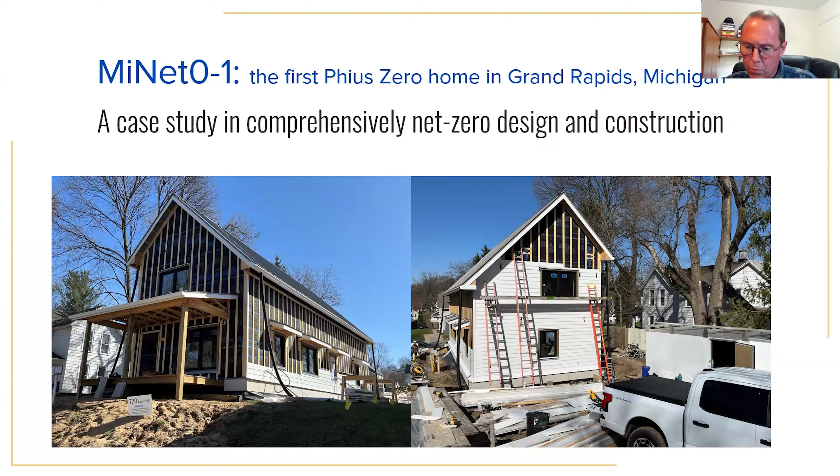The title for this presentation was Net Zero When? And when do we want net zero? We want it now. So trying to move as quickly as we can toward that and just do it.

Talk a little bit about how I came to be in this spot after 30 years in commercial HVAC. Some innovations in the house, the foundation in particular, are pretty unique. And then go through some more normal passive house best practices, with the survivability piece there being pretty innovative also. And then take a look at this all from a life cycle cost analysis perspective.

So a little bit about me. As I retired here in 2020, I started the process of retiring, and I spent a little bit of time with a pastor, counselor from my church, and walked through Enneagram and skills and values and the book Let Your Life Speak by an author named Parker Palmer.

The goal of all that was to come up with a mission statement, and you see it there in yellow at the bottom: I learn and create in order to help people live sustainably. That helped me focus a bit because I'd been doing some climate advocacy work since about 2017. I'm okay at it, but I'm not the world's greatest salesperson. I'm better at just doing things and creating things. So that helped me focus where I wanted to go.

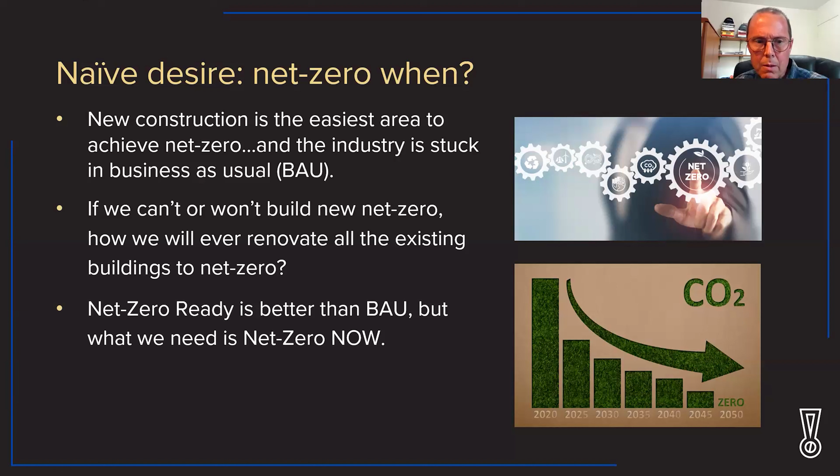I saw Griffith's book, Electrify Everything. We've got 1 billion machines in the US that need to be electrified over the next 30 years. We need to start with the new stuff. If we can't build the new stuff net zero, how are we ever going to get all the existing buildings retrofit to net zero? So it seemed to me that's the place to start - let's figure it out on the new buildings. Some of you are already figuring out how to do renovations, but frankly renovation's harder, and I wanted to start with what seemed a little easier. So, yeah, wanting to get to net zero now.

So, first innovation was to design the house on a narrow city lot - a 50 by 175-foot lot - and design it as kind of a long shotgun house, optimizing that roof so I've got lots of south face with enough solar to power the house and 2 EVs. I got certified with Solar Edge Designer 1.2 so I could run preliminary runs on the solar and play around with the roof size and profiles to get that to work right.

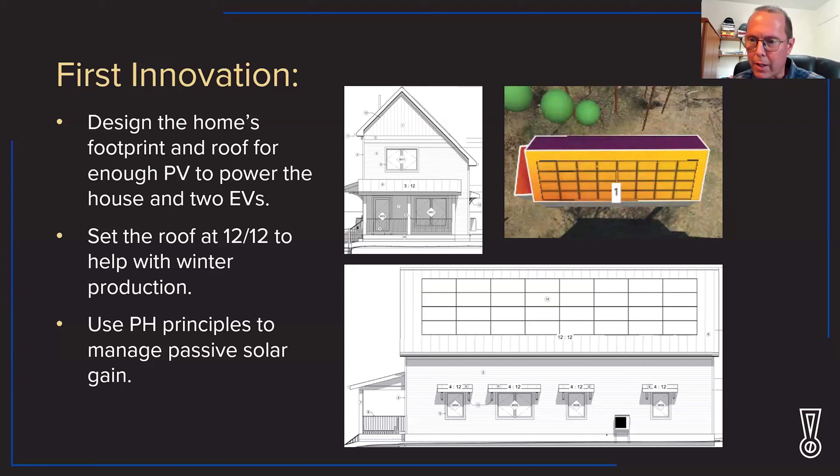Also decided to set it at 12-12 so we can shed snow a little better in the winter, and also optimize winter production. And then, of course, using some passive house principles on those south-facing windows you see in the lower drawing there. So some innovation there, but something I'm sure others of you have thought about too as you design a site and the roof line on the house. But I think it's important - let's not ruin that roof when we have a chance to get it right for the next 100 years. Let's set it up for success for solar.

So second innovation really has more of my fingerprints on it. I spent multiple hours sketching and playing with ideas of how to get to a concrete-free, foam-free foundation system. I combined 3 rare ideas to get to this, and put it all on a base of foam glass aggregate. This was something I would do again.

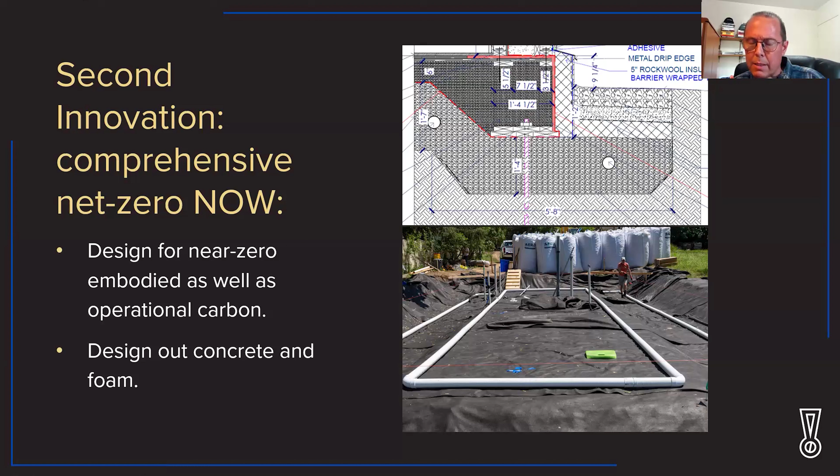But the goal was to be not just net zero operational, but net zero embodied carbon. Here's the foam glass aggregate going in these 3-yard super sacks, getting compacted. This is the part I wouldn't do again - these 2 levels. We had lots of struggles fighting with this slope, and the stuff would roll down. And then when we started putting our footing in, it would roll down under the footing and cause us some grief trying to get the footing nice and level.

So next time I would just do it all flat and fill it with more pea stone, which you'll see in this next slide. So here's the wood foundation going around - 2x6 inside, 2x4 outside on this treated plywood and 2x8 base, glued and screwed together, glued with climate adhesive, which we'll talk about more in a minute.

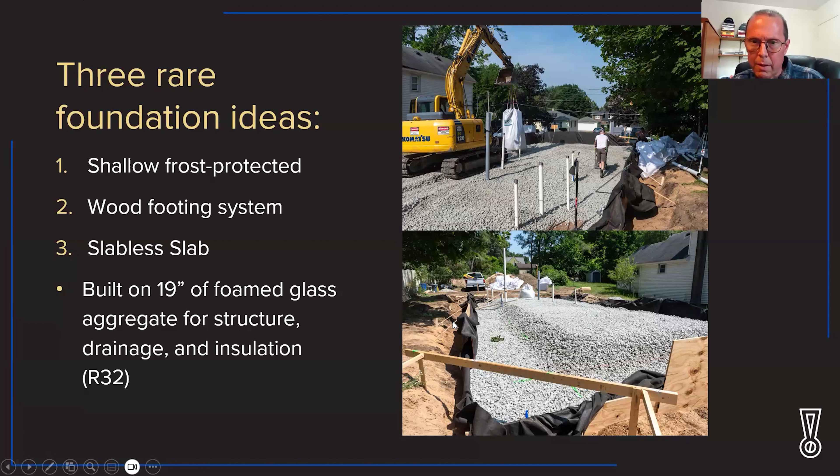And as we built that up, then we filled it with pea stone - 6 inches on the main floor, the slabless slab area - and then filled the footing up on the outside. So there's 50 tons of pea stone in here. Had we just made this flat across, we'd have had probably 100 tons in there, but I think it would have been a simpler way to build it, and pea stone's pretty cheap.

So, yeah, we screeded the pea stone across the footing. We put some screen in here - this darker color is a fiberglass insect screen that we use to keep the pea stone from getting into our tongue and groove plywood here. We had 2 layers of tongue and groove southern yellow pine plywood that we glued and screwed together, again with climate adhesive.

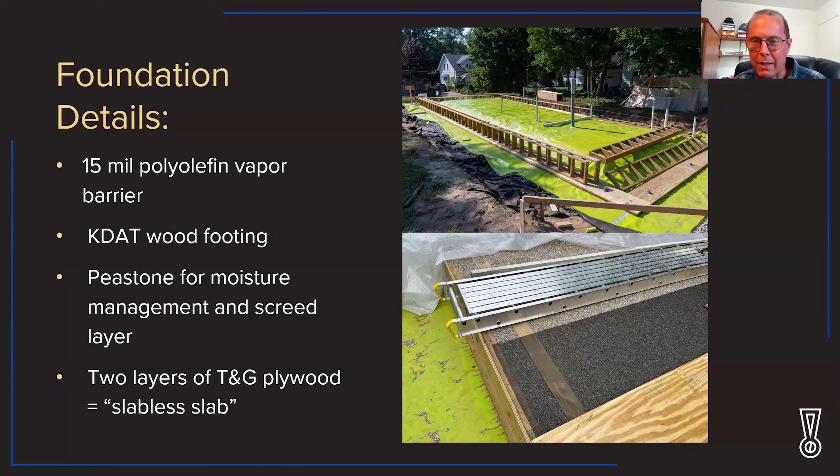So those three rare ideas, the shallow frost protected foundation, the wood footing system, and the slabless slab all on that gravel base is probably the most innovative thing in here. And as far as I know, the first one that's been done in the country. I did get the idea from, I've got to give some credit to the folks on the Building Science and Beer show. I believe it was Mike Guertin had a little sketch he held up at one point in a webinar they did maybe two years ago. And it's like, that's it. That's what I'm going to do. So I took their idea, modified it a bit, and put it on this foam glass aggregate base.

So into more typical best practices when you're trying to build low embodied carbon, use natural insulation. I chose TimberFill and Timber batts from TimberHP out of Maine. Very happy with the product. I know they're kind of struggling with some financial, getting to the next step to do their timber board right now, but I would use them again, assuming they can financially pull through a Chapter 11 reorganization I understand they're going through, but good product.

Really happy with it. We've got 13 inches of the dense pack in the main wall cavity, and then plus 3.5-inch batts in the inside service cavity. Makes for a very quiet house. And it sequesters about 8 tons of carbon in itself, weighed about 12 tons. So 12 tons of insulation in the house is just kind of an interesting number to know.

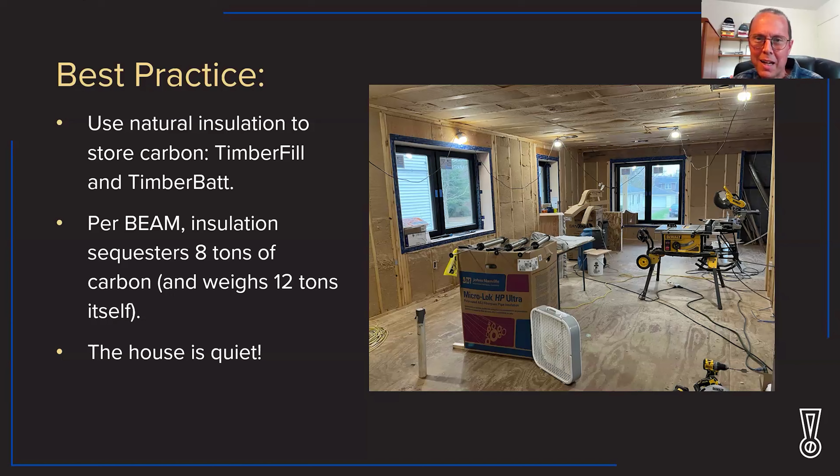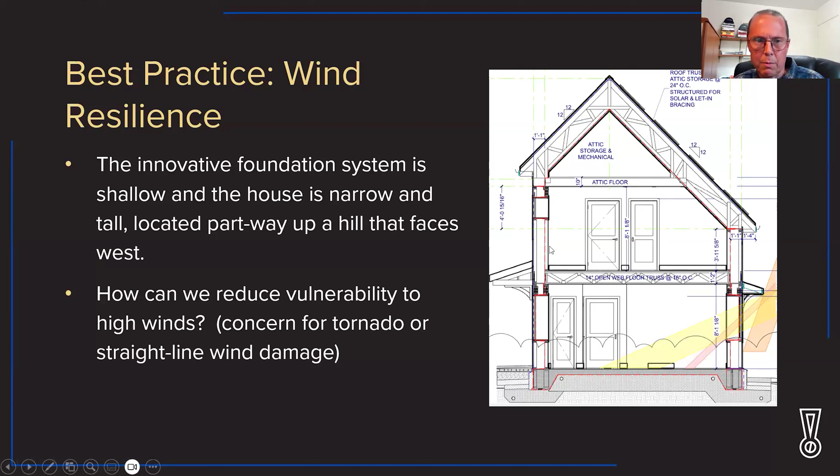And decided we have ground screws. So basically everything's fastened together. So the goal is to make this less vulnerable to wind. How do we get there? We fasten everything together with continuous connections from the ground to the roof, following the ideas from the Insurance Institute for Business and Home Safety, IBHS, which has a FORTIFIED standard that I checked into a couple years ago.

Wish I'd have found somebody to certify it. I made one call to the one person who was listed in Michigan, and he said, I'm not doing that anymore. Just kind of build to the standard and don't certify. Well, I wish I would have chased a little harder and actually gotten it certified, but I didn't. So we'll do that on the next one.

But anyway, you can see here's our ground screws going through that footing system. They're about 46 inches long, go through the foam glass aggregate down into the sand. There's 16 of them around the perimeter. And again, everything is screwed with stainless steel GRK truss screws, in addition to normal nailing. Also used blocking up in the attic trusses. There's blocking between them, which gives that a bunch of stability and more ability to fasten it down.

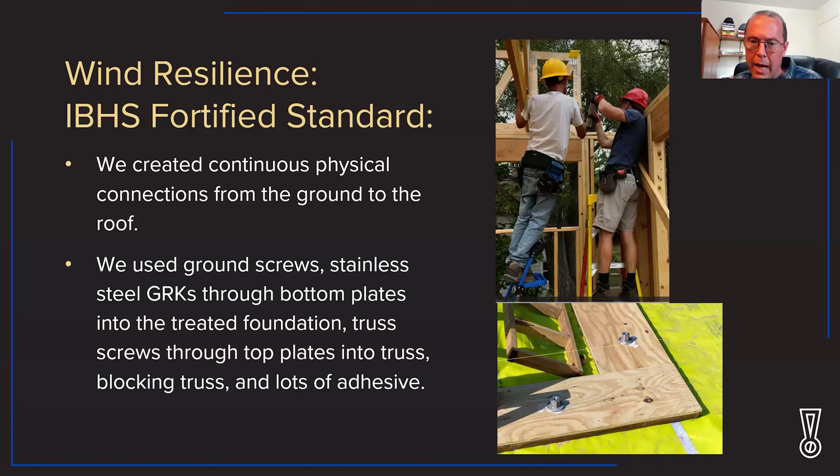And everything's got lots of adhesive in it, which is where we can pivot to Kristen here. Yeah, we used it everywhere in the building, under our subfloors, under trusses, throughout the building, and it significantly strengthens those connections. So Kristen, go ahead. Yeah, sure. I don't know if you want to advance the slide.

But yeah, Dale heard a webinar on Green Home Institute, which we gave, and I think during the webinar he ordered a case, just fearlessly willing to go where innovation proves itself to be viable. So hats off to Dale for helping create this beautiful, beautiful case study. I've been there a few times and it's just an amazing space to be in. And Dale's an amazing innovator.

So he put it under plates, subfloors, sheathing. It's intended to act like a monocoque system and give that continuous load path. And the secret sauce, if you will, is its ductility. That's why adhesives are not allowed in code right now. We are going to change that. I am personally working hard to change that so that people understand that there's a new capability in the vertical to disallow the embrittlement that a urethane has done in the past, and that's why it has been disallowed in the past besides in a subfloor application.

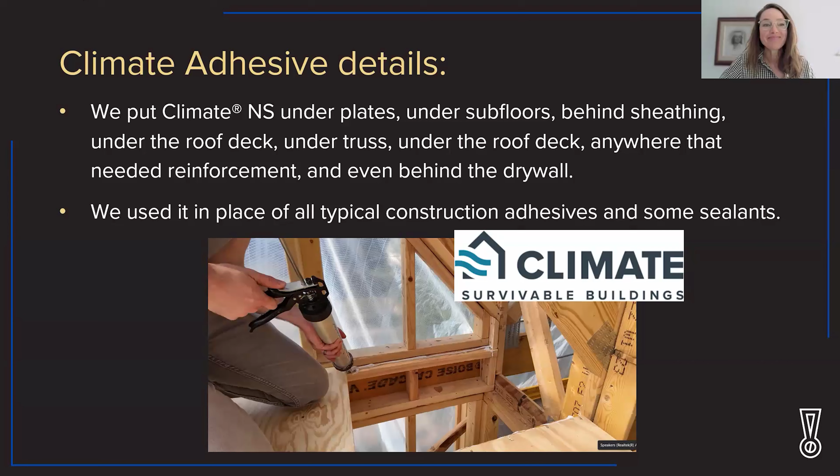Yeah, just one other thing. I'm a data geek, so I did check out your videos. Or maybe one of your people sent it to me, but there was a video of the testing at Western Michigan University. So anyway, just nice to see that it's not just claims, but there's been testing done and such. Well, goodness, yes. We're in the middle process, like I said, of getting into code. Before that, we're doing our ICC ESR, sort of the gold standard for all structural engineers and architects. So there's not going to be any question about anything whatsoever, but there is a wealth of information.

Anybody who wants to geek out about load and kips and all that, because we do apply to a shear wall application as well as uplift. So we mitigate against seismic as well as violent wind events, which unfortunately more and more of America and the globe is becoming subjected to and vulnerable to. So we wish we weren't so relevant, but we're here. Great, yeah, and excited to be using it and pioneering it on this project. So thank you. Thank you.

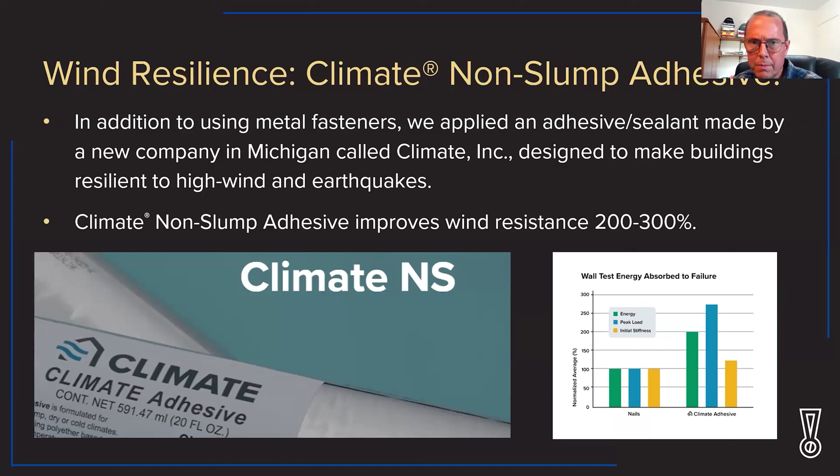Another thing I would consider a best practice: when I first looked at all this, I thought, do I want to certify? When I started watching Green Home Institute, there's this alphabet soup of different certification options out there in the world. And I thought, now I'll just build a good house. And then the more I got into it, it's like, no, I think I need to certify. I need the support from people who have been down this path before. And there's something about just the credibility that certification brings.

So I looked at ILFI, International Living Future Institute as well, just from a holistic, creating a beautiful space kind of ethos, and didn't decide to do that. This house is LEED Platinum and Green Star Platinum as well as Phius Zero. So I've already got a pretty good list of certifications to chase. So I didn't chase it, but we are doing native landscaping per this plan. And I've got some pictures I could show if there's time at the end of landscaping going in right now. And I've been surprised at how good it feels to see plants going in around the house, and trees and little shrubs. It really makes the house.

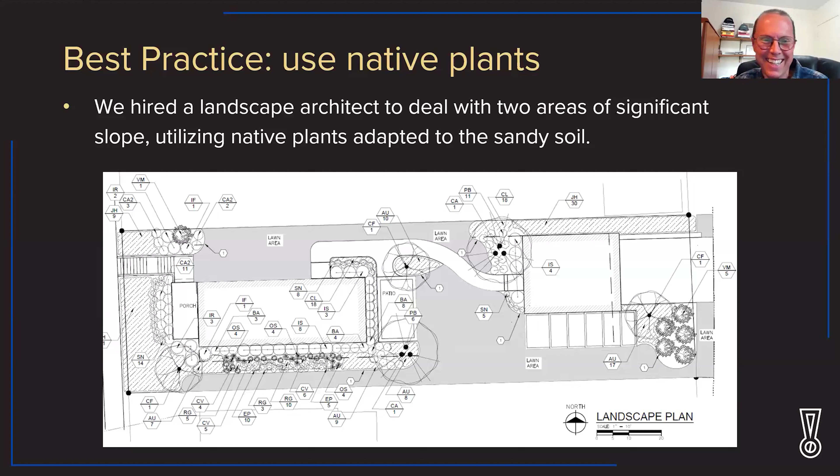So just quickly summarizing, how are we doing on time? I think we're doing okay.

I'll kind of run through this quicker, pick up the pace a little bit, but just kind of the recipe for the house, kind of at a high level spec level. You can see our 59 walls, 94 roof, 36 floor with the foam glass aggregate down there. It's a double membrane system. Intello is the primary air barrier on the inside double wall. It's on the exterior side of the interior double wall.

So it's protected from people ever putting nails, hanging pictures and that kind of thing, which made a lot of sense to me. Those membranes are extremely valuable, and we spend a lot of time detailing them, and you want to protect them. So the Mento on the outside is a vapor open and water resistant barrier, and that's protected by the rain screen on the outside. We talked a little bit about low embodied carbon design already. I got a slide coming up where you can see some of the BEAM calculations on that.

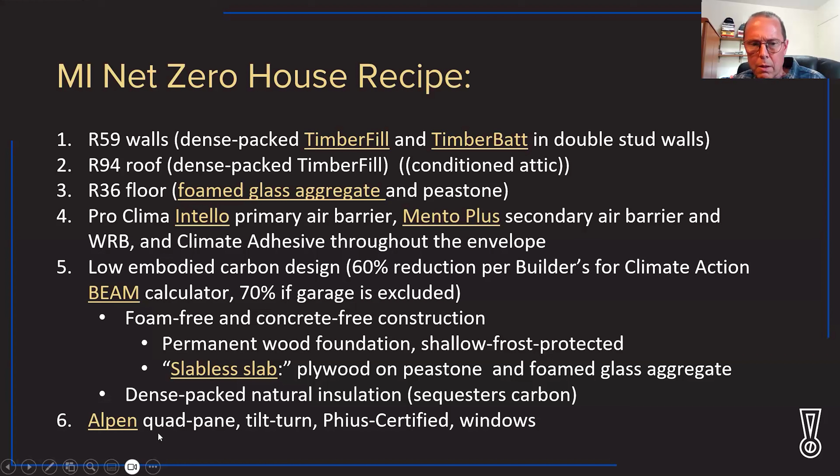I used Alpen, quad pane, tilt turn windows. They're all operable. Finishes, tried to pick everything. As far as I know, I succeeded. It's so much work to look at all these details as you go. But trying to pick red list free materials, and net zero materials when possible.

We're using a Milestones net zero tile, Yorktown maple cabinets that are domestic, Dekton countertops. They come from Spain, which I don't love, but it's a net zero product for countertops. And Benjamin Moore paint. The LP SmartSide has got lots of adhesive in it, which I don't love, but it's a decent product from an eco standpoint.

Here's the appliances and HVAC. Little 1-ton Mitsubishi heat pump. I did go with a Sanden monoblock heat pump water heater. CO2 is the refrigerant in it, which I think is fantastic. I think that's the future. I'm a heat pump geek. In my former life, we converted rooftop units into heat pumps in our shop. We did custom kind of work in our shop. So I'm pretty familiar with the details on heat pumps and low ambient heat pumps in particular.

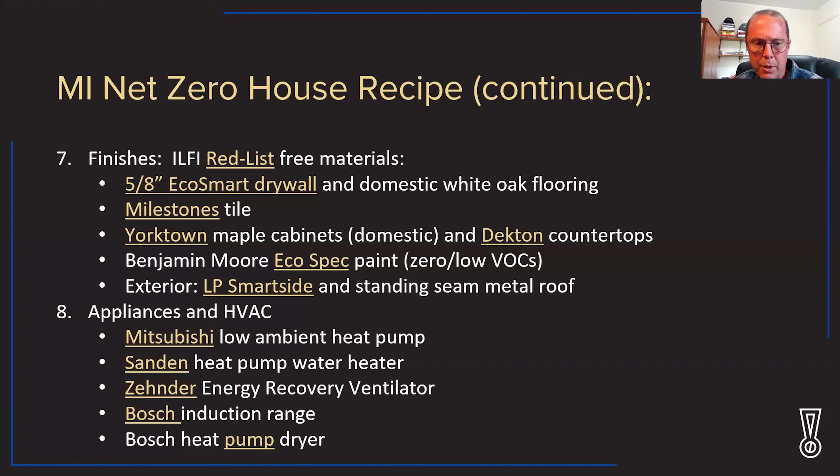Using a Zehnder Q450 with the boost switches and the humidity input and the CO2 input. So I should have a very intelligent ventilation system, Bosch appliances. And then, of course, the solar system, we went with Enphase with Meyer Burger panels, 32 of them on the roof, 40 kilowatt hours of battery, two 9.6 kilowatt EV chargers in the detached garage, which we haven't started building yet.

The site kind of precluded building the garage because we had to get equipment down onto the site as we went. So it's almost like a second project that will follow. I probably have an excavator there next week, so we're getting close to doing that. And I wanted, in the worst way, to do vehicle to home or vehicle to grid would be better yet. And Enphase had announced the product 2 years ago, and they still aren't shipping.

So I'm doing what I'm going to call poor man's vehicle to home, putting a 30 amp generator plug in the garage. I happen to have a Ford Lightning that I've been powering the job site with, including a temporary heat pump. And yeah, it works well. It's quiet too compared to running a generator. It's awesome. So anyway, I'm putting a 30 amp generator plug in there, which is 7.2 kilowatts of power that will go into the Enphase system if needed, in a situation where you wanted to also use your car battery.

So I've got Span electric panels, two of them, one in the house, one in the garage. And at this point, still planning on a Consumers Energy interconnection. I'm a believer in the grid for grid load and generation diversity helps us. And helps us be more efficient with resources. So in general, I believe in the idea of having a grid.

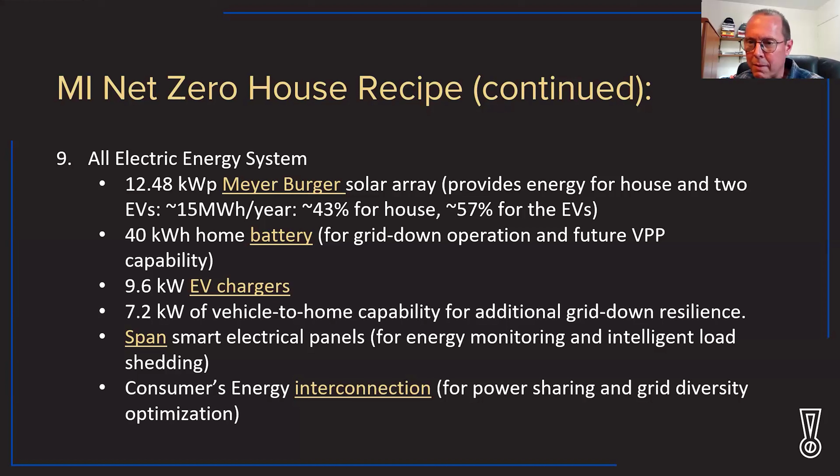I'm extraordinarily frustrated by the interconnection rules here in Michigan right now. I might not end up with panels on my roof till after the house is done, which is crazy from a project management standpoint. So anyway, that's kind of the high level recipe.

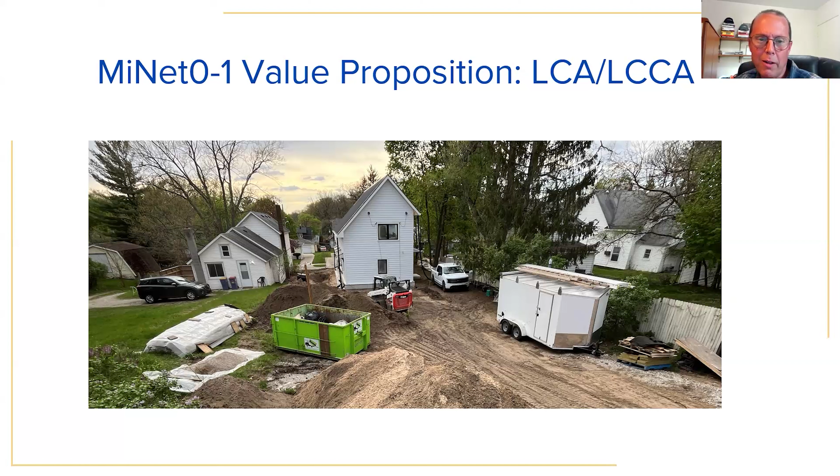And wanted to spend a little time on thinking about costs, because I mentioned I went into this with some naive desire at the beginning. One was on costs. I thought I would build a modest house. It's 1,510 square feet, in a modest neighborhood. There it is between the neighbor houses, and it looks small in this view. It's kind of a wide angle view.

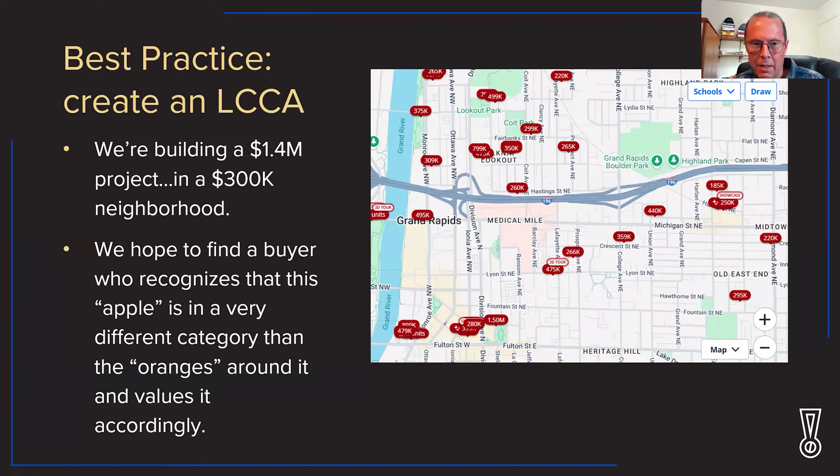It's in a neighborhood where the houses are probably 300,000 tops, with a few more expensive houses within a couple miles, but this is definitely an apple we're trying not to directly compare with oranges, or at least to show a potential buyer why this house is worth $1.4 million. My biggest challenge is I built this house the way I'd want to build it for myself, quality stuff everywhere through the process, and it ended up costing double what I had imagined at the beginning.

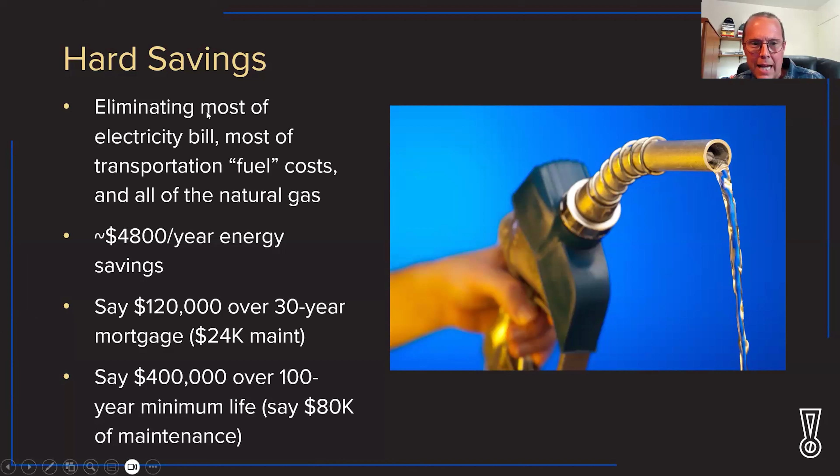I made an attempt here to quantify the value of a house like this, so I'll try to go fast. I've got a few different buckets. The easiest one is the hard savings, the energy savings, which amounts to about 4,800 bucks a year saved in fuel, both for vehicles and for the house. That's 120 grand over a 30-year mortgage, allowing a little for maintenance, if you had a 100-year minimum life, since the membranes are rated for 100 years - maybe it's a 300-year house, we don't know for sure. But that's the easiest thing to quantify, adding up those energy savings.

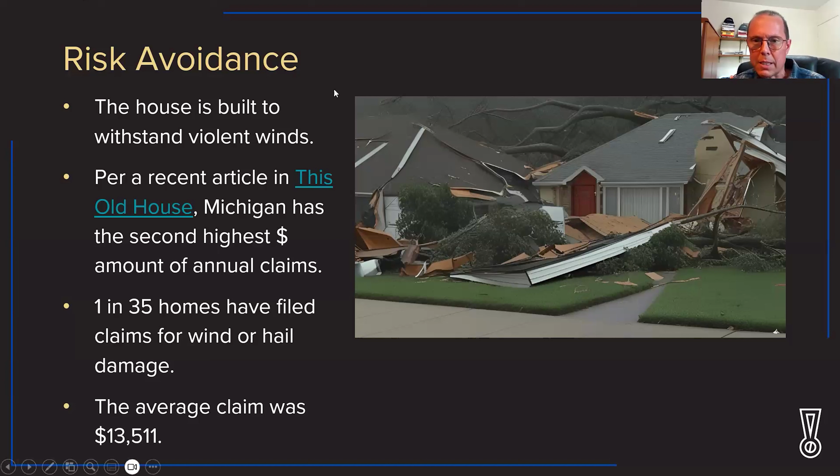There's also risk avoidance, which we've already talked about with the winds. These numbers get less solid as we go, and I've actually built a little spreadsheet where I could sit down with a potential buyer and run through: how many dollars a year is it worth to you to have a house that's going to stand up to wind much better than your neighbors would?

The house should not form icicles - it just shouldn't happen. It's a vented roof deck with R94 insulation in the roof. It did not form icicles this winter. The steel roof's been on since November. I didn't have the house fully heated through the winter, I had some heat in it, so it wasn't a perfect test, but I'd be amazed if it formed any icicles.

And like all passive houses, it will hold heat for days in the event of mechanical problems. In our case, we go home on weekends, the truck's not there, so the heat pump doesn't run, and it's dropped 5 degrees by Monday. So we know the house holds heat.

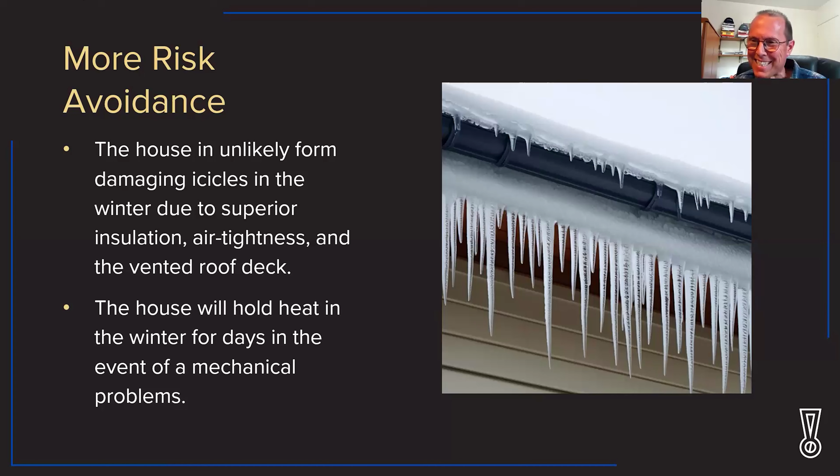But this was a way I could directly try to reduce the emissions of somebody's life who might buy this house. It ends up being about 14 tons a year in operational emissions reduced, including the vehicles. That's about 2/3 of the average American's carbon footprint - the house energy use plus vehicles is like 2/3, and what's left is what we eat and stuff we buy. If we fly a lot, that adds to our footprint, which you can buy offsets for if you want. So I'm trying to help somebody get to a net zero way of living.

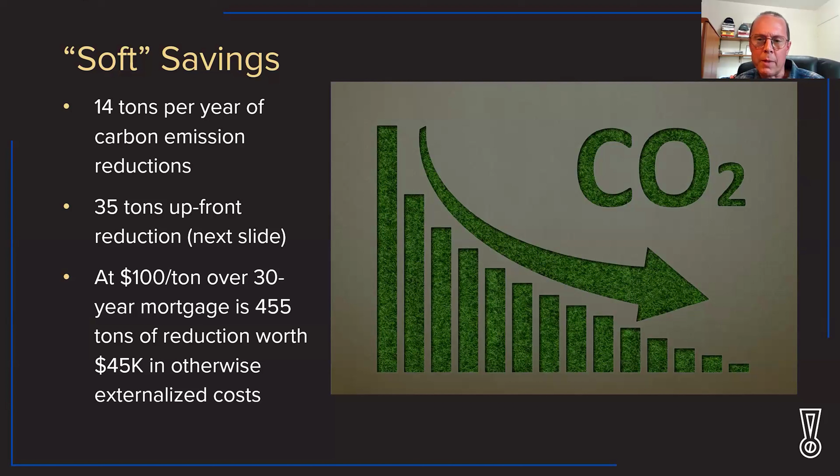So here's the embodied carbon details from the BEAM calculator. We're at about 24 tons for the house and garage as built. The garage is over 1/3 of that.

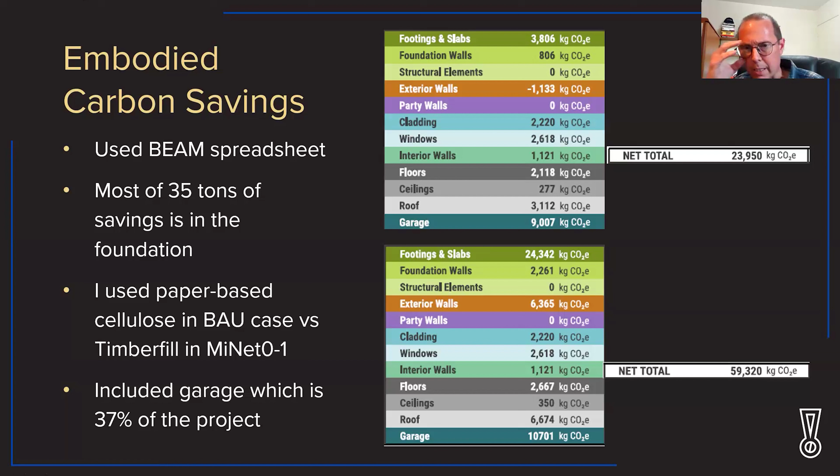The garage, unfortunately, needed to have conventional cement footings and frost walls in it, and I cannot find anybody in West Michigan who will sell me low carbon cement yet. Very frustrating - I've spent quite a few hours digging around and come up empty. A more conventionally built house would be more like 59 tons for this same house built more conventionally. I did use a paper-based cellulose, and in this analysis this number would be worse if it were fiberglass, and much worse if it were foam.

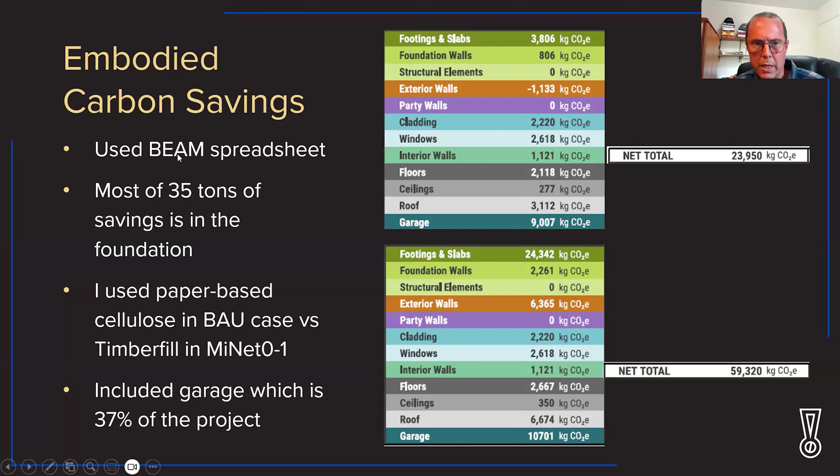The cement is probably the biggest reduction you get, and the next biggest is not using foam. There's details on that. It's a great tool, simple to use. If you haven't run into it, it's worth looking up: Builders for Climate Action out of Canada, called the BEAM spreadsheet. It's a Google sheet.

The house is going to have super fresh filtered air. I'm putting in a MERV 16 filter, which I believe is a Green Star Platinum requirement. And I'll provide them a meter to watch their PM 2.5, radon, CO2, and VOCs.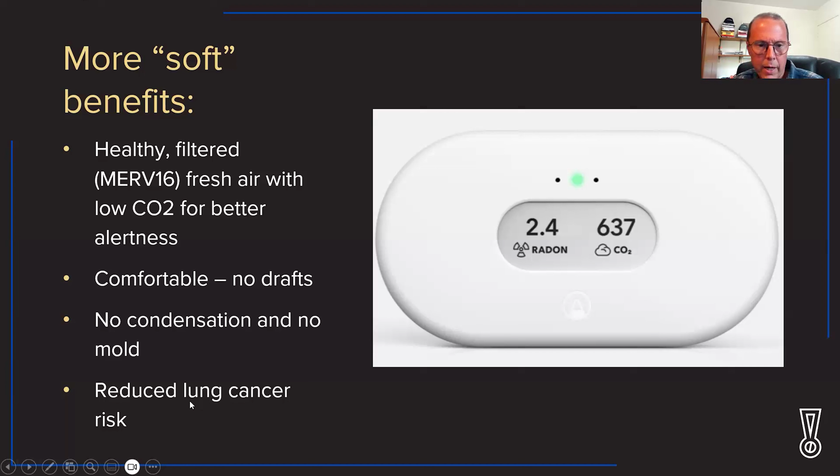The houses, all passive houses, will be comfortable. There won't be any drafts. There'll be no condensation on windows, therefore no mold on windowsills and that kind of thing. We've reduced the chance of radon through the passive system, so the lung cancer risk is reduced. We've used non-toxic materials like we talked about.

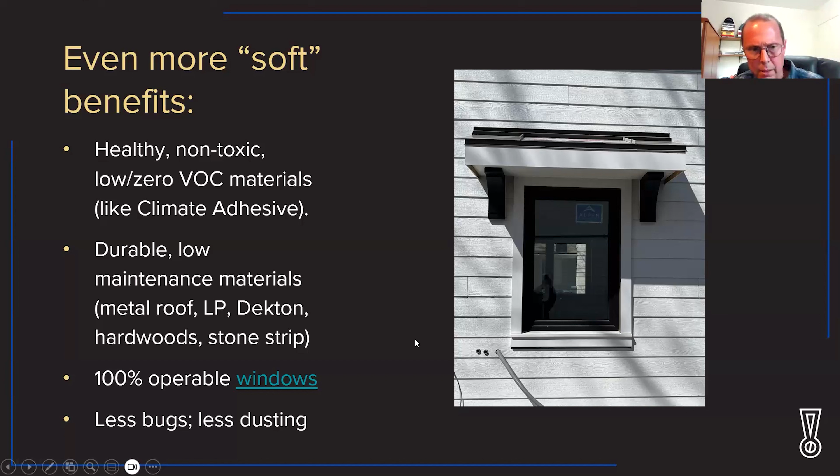We use low maintenance materials like the metal roof and the LP siding—both of those are 50-year systems. The Dekton countertops are a 25-year system, I believe. The hardwood floors have a 30-year warranty. It's got stone strip around the outside that keeps splash off the house. Windows are all operable, so there'll be less bugs and less dusting than a normal house.

And you've got energy resilience and independence, with things we've talked about already. Here's my little quip on this: let's say you've got a grid-down event, and the sun's not shining because it's January and cloudy here in West Michigan, and the batteries are getting low. You could call up your spouse and say, 'Hey honey, the grid's still down. Could you pick up 30 kilowatt hours of power on your way home from work?'

And you could plug in and power the house for another day or two from the vehicle. So this house is really close to being able to go off grid. In fact, if you're willing to do this for December or January, you could be off grid just by taking your power home with you in the car. I spent a lot of time thinking about going off grid, and it really didn't quite make sense to me at the end of the day.

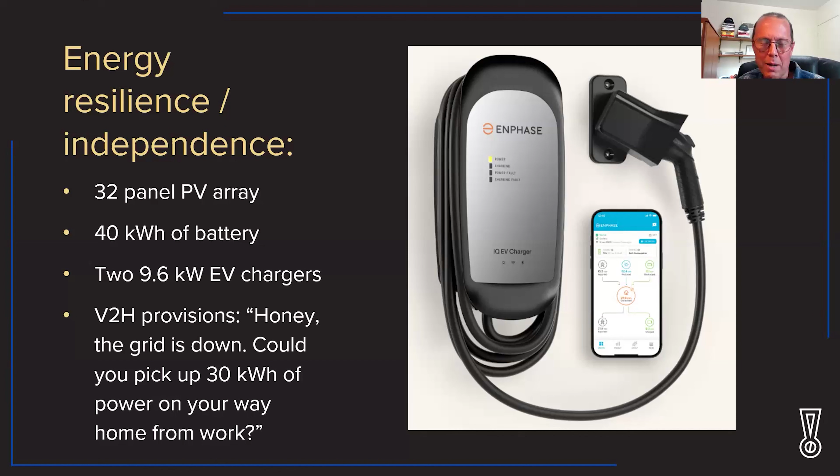So it's quiet, it's safe, there's no gas in the house, so no chance of leaks or explosions from that. I have it pre-wired with coax and Cat6 to the bedrooms and living room, and some provisions for bringing in future technology from outside into a little office area on the main floor.

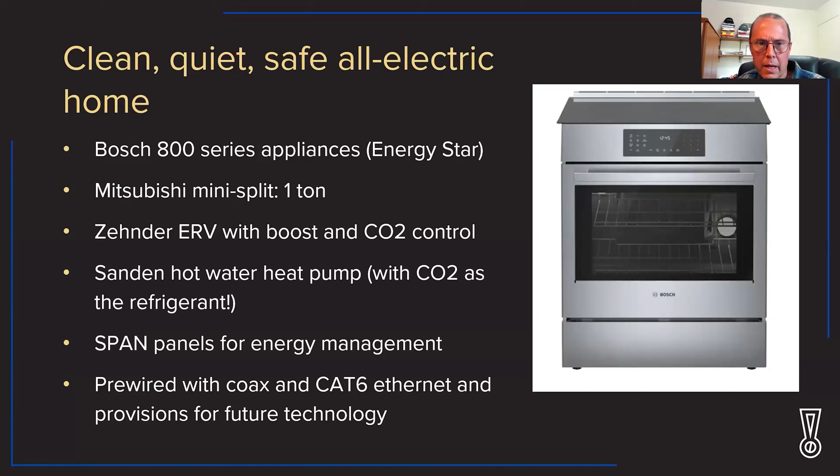This is the last slide, and then we can go to Q&A. I purposely picked this lot close to downtown in what we call the medical mile, hoping there would be a professional who works downtown—maybe a doctor who works in the research institute downtown—who might want to be able to walk or bike to work.

There's 2 parks right close by within 2 blocks of the house, and I'm just trying to make a place that would be great for raising a family. So that's kind of my attempt at a little bit of a loosey-goosey LCCA, just trying to quantify some of the values that a house like this brings.

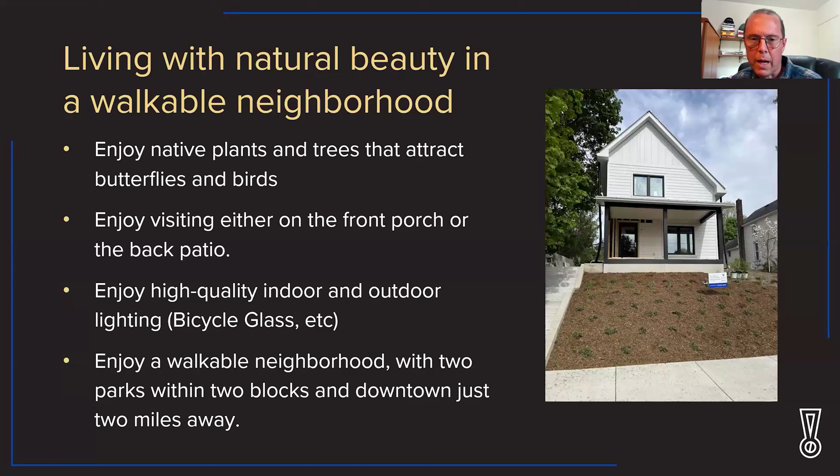Again, there's a spreadsheet tool—you could assign dollar values to these different things and say, yeah, this is worth X to me. I'd like to say your home's design is a key to living a net zero life. There's my contact information: my email is dale@minetzero.com, and there's my phone number.

And I thank you for taking time to listen to me run through a lot of information. I know this is dense. So I'm happy to take questions.

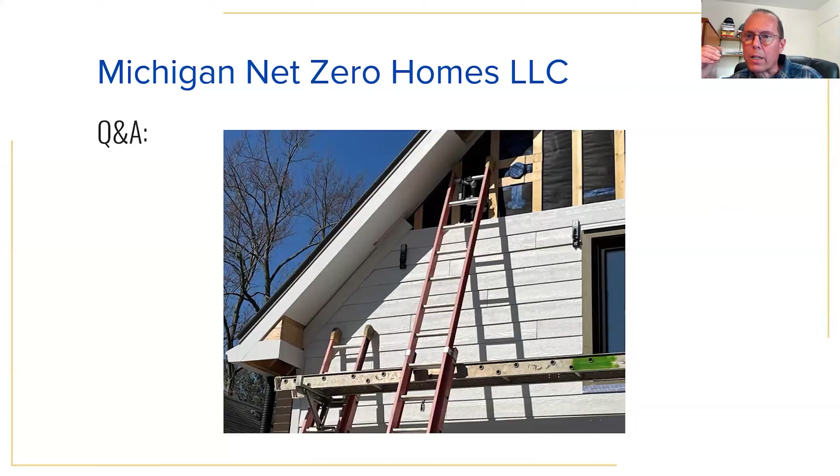Dale, that was perfect, both in the timing, in the content, and in the inspiration. You're taking everything that our communities are learning and teaching each other and putting it together in a package that shows people it's doable, is proof of concept, and is really, really inspiring, exciting stuff. Okay, we're going to jump into questions—we've got a stream of them. First up, if Christina, you're still with us, you had a question about deconstruction.